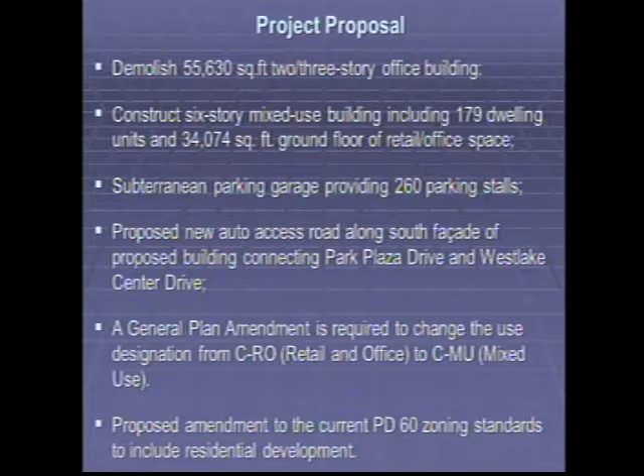Here's an existing and proposed site plan. This is the outline of the existing building. This is the outline of the proposed building. This is the new street that's proposed, where now it's a walkway. So circulation would come off of John Daly through this, what could be considered kind of an alley, and then through the parking lot and out to Westlake Center,

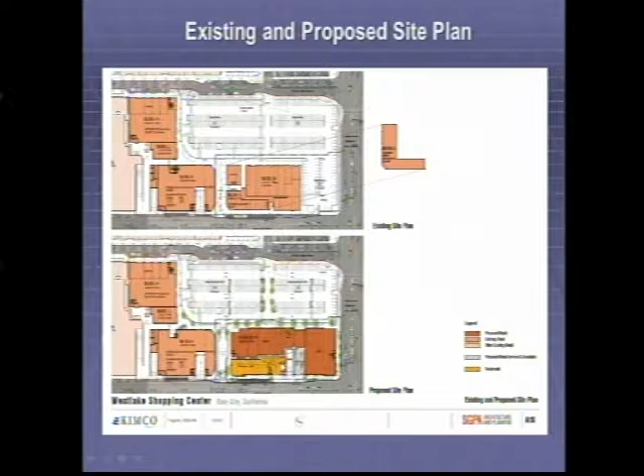A little bit more of a detail of the ground floor plan. This would be the main entrance to the residential portion of the building. This here is the residential leasing office. And then there is, of course, ancillary space in here for the operation of the building itself.

Here, this is the parking entrance. And this is the lobby, the main lobby of the building. This area here is sort of a service area for deliveries, including deliveries to the office area and residential deliveries for food and other things.

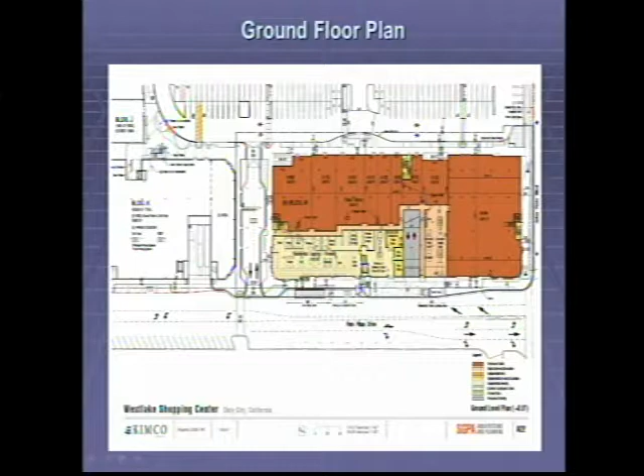This is a plan that we in the planning division had some concern about in terms of just how circulation would occur around the building, through the parking lots, out to

Westlake Center. This is a plan of pedestrian and bicycle circulation. The blue arrows are entryways into the buildings.

The orange color is bicycle circulation. The pedestrian circulation is this blue area here.

And the project sponsor will get into more detail, and we're still working this through, but it is acknowledged that the circulation around this area of the Westlake Shopping Center is much to be desired, and the insertion of this building and the activity that happens there will of course intensify it. So this is kind of still a work in progress.

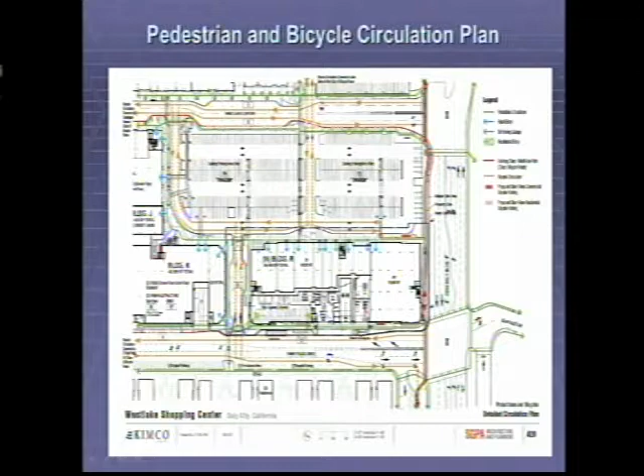The vehicular, bus, and service vehicle circulation is here in blue. So there's some attempt to try to keep them separate from the pedestrian and bicycle circulation and have them work together.

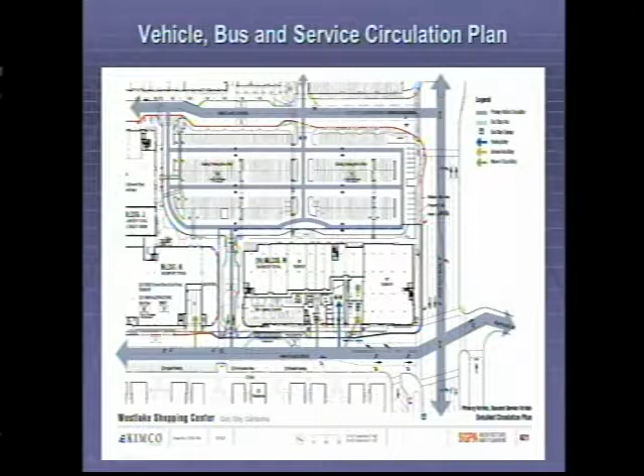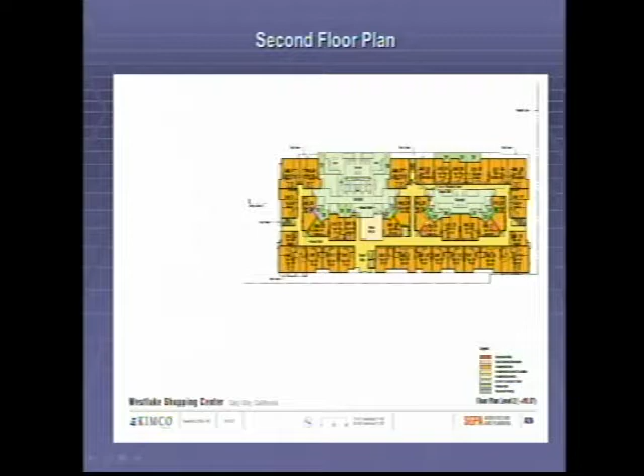This is a second floor plan, which also includes two courtyards that face the parking lot. Third, fourth, and fifth floors are typical to this scheme, all looking down on a courtyard facing the parking lot.

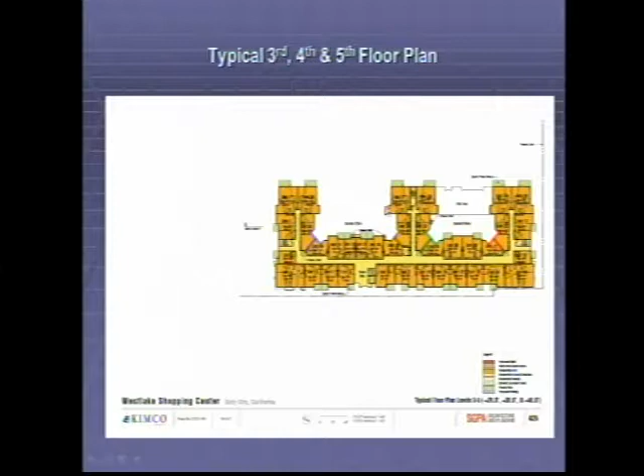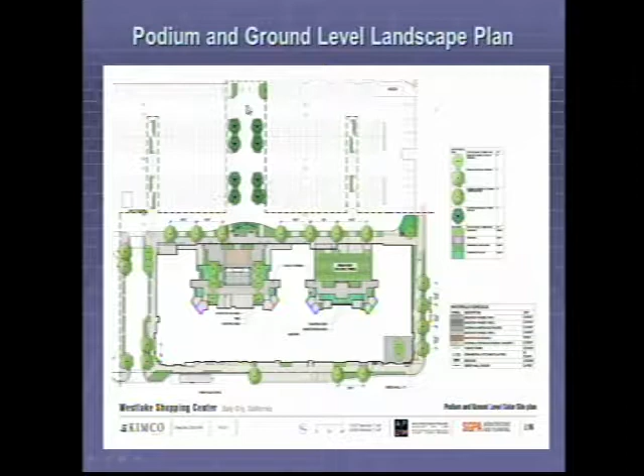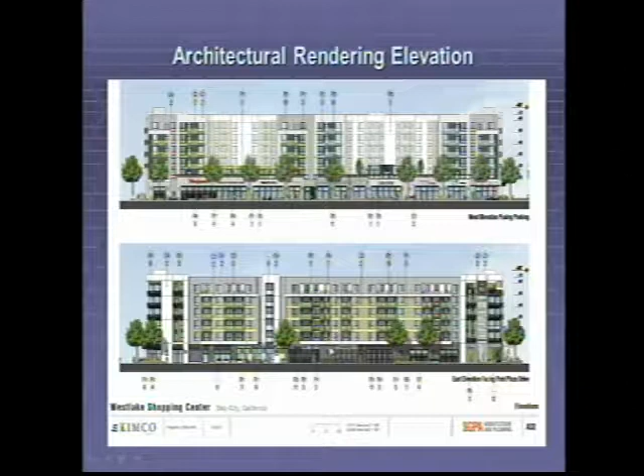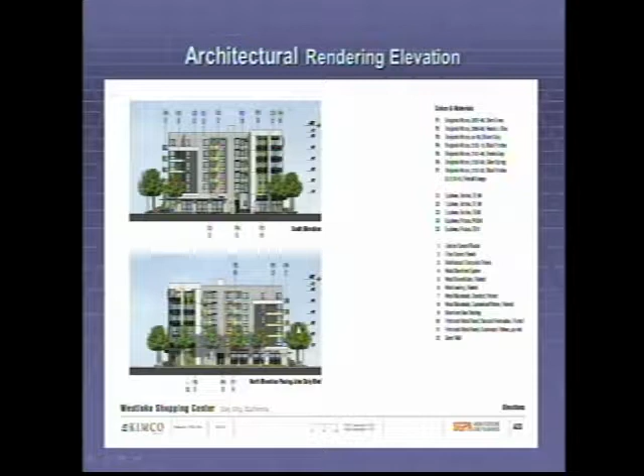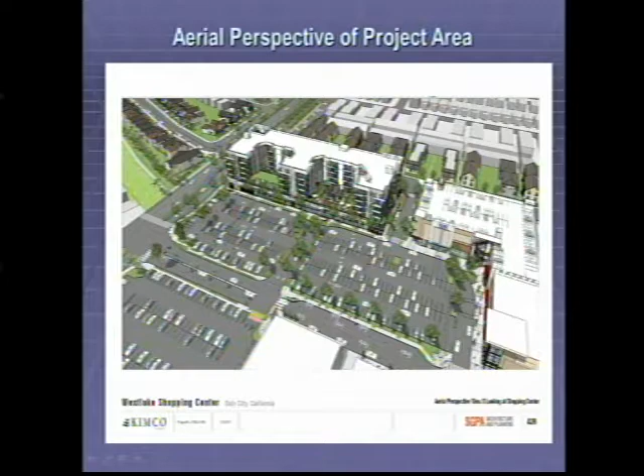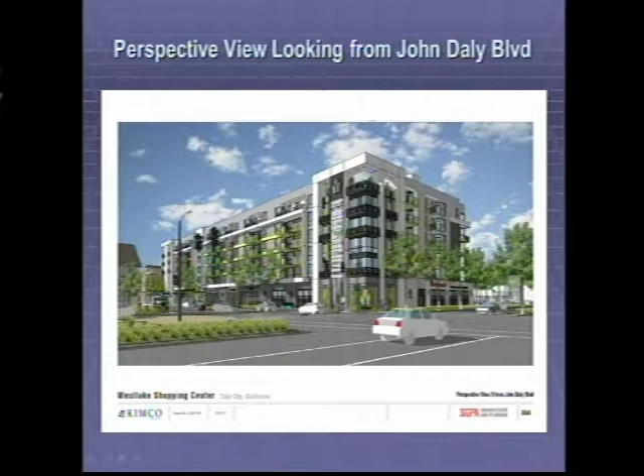Perspective view from John Daly, taking a left off of John Daly onto Park Plaza Drive.

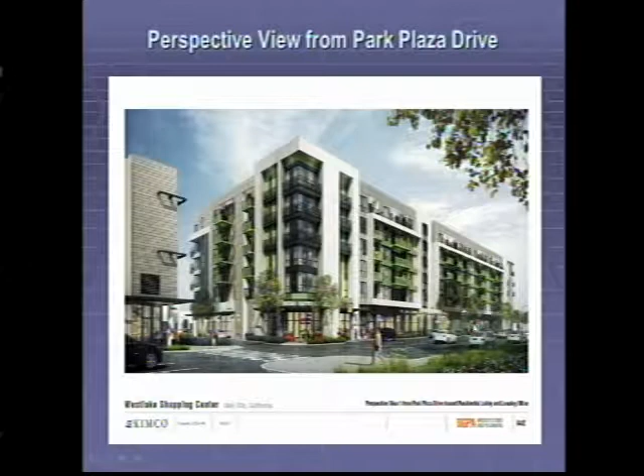This is Park Plaza Drive and the new roadway, between this and, I believe, Sleep Mattress here, and of course the proposed building. This is the leasing office, and this is the main entry to the residential portion of the building, and here are the vehicular entryways to the residential portion.

This is the corner of the parking area and the new roadway. You can see the balconies, how they're a little bit more defined, and you can sort of understand how the architecture works here.

Obviously, the architecture is very modern and sort of simple and clean, which is something that we thought was consistent and compatible with the neighborhood and the history of the neighborhood.

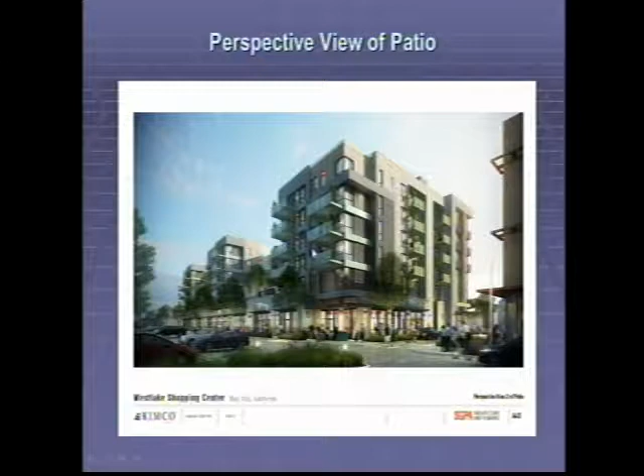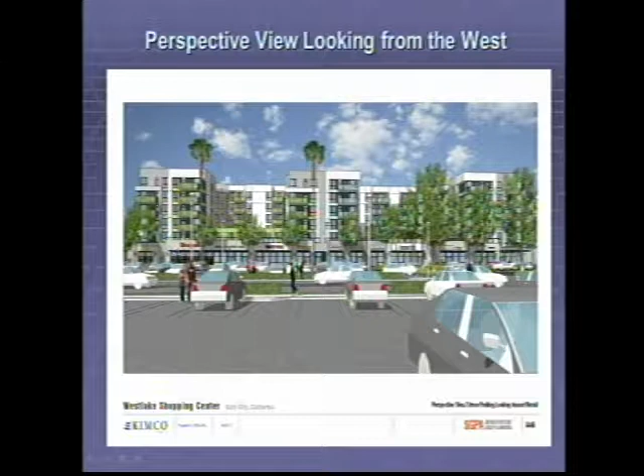Perspective looking from the west toward the building. Existing palm trees here, and all of these are, of course, a proposed tree planting scheme that was depicted in the landscape plan.

This perspective of Westlake Center Drive, looking at the west facade. We're still working with the project architect and project sponsor on proposed signage. This is silhouetted so you can see the building, but that's where the existing sign would be.

There's also some lighting discussion that needs to be had to make sure that there is pedestrian lighting, especially along the retail spaces, the retail portion of the building.

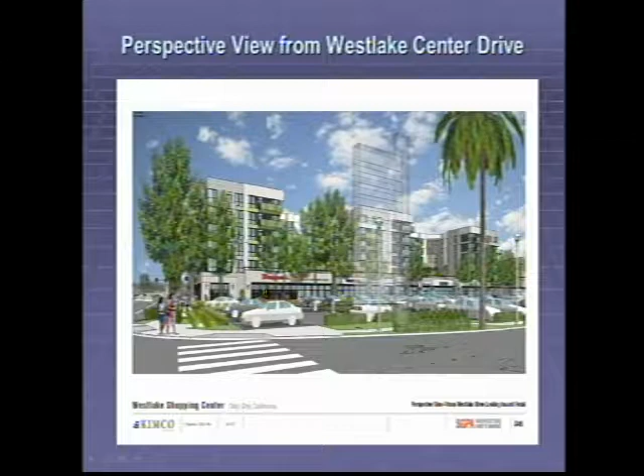These are photo simulations. They're a bit hard to see, but looking down Park Plaza Drive, this is the existing building, and this is the new building.

From John Daly Boulevard, we can see the existing building back here, and this is how the new building would fill that space.

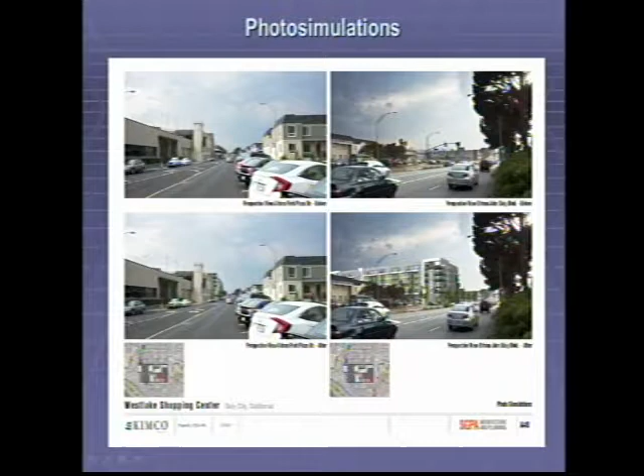Looking from Cliffside, that's the existing building over here, and this is the proposed building there.

And the view from John Daly Boulevard, this is a little further west. You can look back and see the photo simulation of the change in silhouette here.

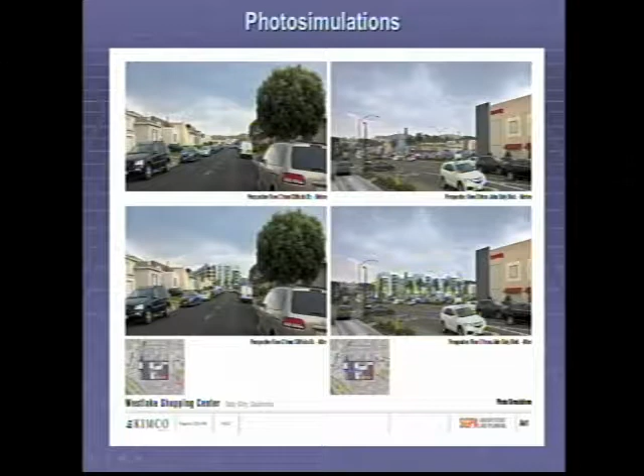The environmental study, or the initial study I should say, for the environmental review of the project is still under review by staff. We were able to extract a few things out of it and give it some initial analysis.

One of them was parking, the other's traffic. In terms of parking, the PD 60 zoning parking requirements are 3.29 stalls per every 1,000 square feet of leasable commercial space. The proposed project would satisfy the current parking requirement for the commercial use in the center, and separately satisfy the residential component of the project by providing 260 residential parking stalls where only 236 are required by the zoning ordinance. It is likely that staff will require the excess parking, which is 24 stalls, to be dedicated employee parking.

Project affordability: all rental projects of 5 or more units is subject to an affordable housing impact fee at the time the building permit is issued.

As I mentioned, the initial study is still under review. The project, as we see it so far, looks likely to require a mitigated negative declaration. The initial study does find the proposed project would generate fewer external vehicular trips than the existing development during weekday daily and AM and PM peak hours, and that the proposed project would generate 17 net new external vehicular trips during the Saturday midday peak hour.

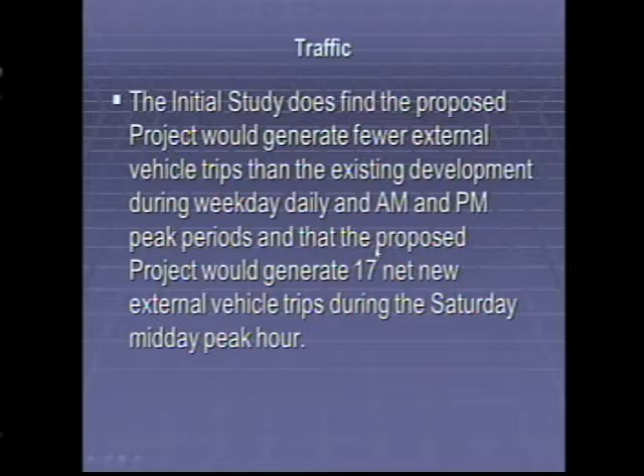The fiscal analysis of the project is estimated to generate revenues of $692,700 per year. The estimated city service costs for the proposed development is $220,600 a year. The net fiscal impact estimated is $472,100 annually. So there's about a 4 times revenue difference here, according to the fiscal analysis.

And I believe there may be someone here to talk about that if you need further detail.

The recommendation is that this preliminary plan for the amendment of the PD 60 be approved. Like I mentioned, the project sponsor, the architect, and I believe his consultants are here to answer any further questions you may have, and of course we'll try and answer your questions as well. Thank you.

So, we can ask questions? Okay, good.

Some of the figures and some of the ideas seem to be a little off. I live in Daly City for 33 years.

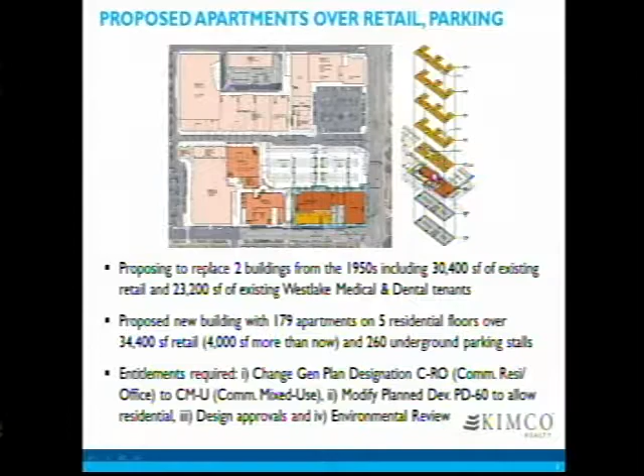All right, why mixed use? What are we doing? We actually think that the Westlake Shopping Center is a great place for mixed use. We're just over a half a mile from BART, which, while not quite right on top of it, is certainly walkable. You see the residents of the Westlake Village Apartments all the way around us that circle us, walking to and from in the mornings and the evenings. So it's certainly walkable to BART, and certainly bikeable to BART.

We plan to have really great bicycle facilities in our building so people can do that. The Samtrans bus lines also go to BART, and that's convenient for the rainy day or for people who may not be able to just bounce onto their bike and roll over there. We're very close to the freeway as well, so it allows people to get off of the local road network as quickly as possible, which I'll talk more about in just one second.

The shopping center, restaurants, services, the retail, these are great amenities for the residents. Can you imagine just being able to wake up in the morning, throw on a sweatshirt, and go down and grab your coffee from Starbucks, or you need a cup of sugar? Don't bother the neighbor, go to Safeway. It's right there. So many restaurants, they're right there. It's actually wonderful for the residents.

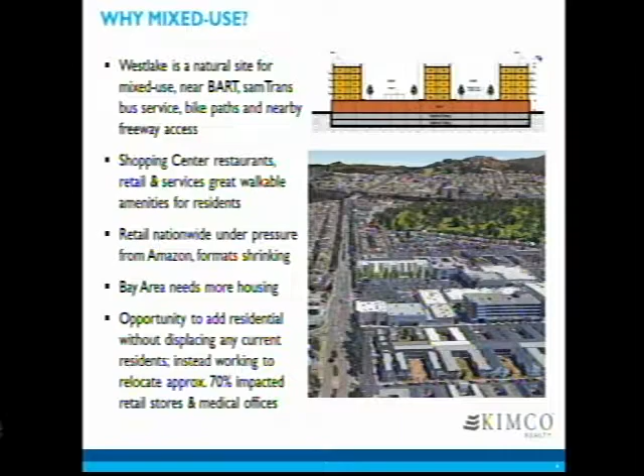There are some tenants there now. We have a number of tenants in these buildings. We are working tremendously hard to try to find homes for as many of them in the shopping center as possible. We know members of the community are used to coming to the Westlake Shopping Center, to their particular restaurant or services. There are some small businesses here. Our current goal is we're working towards trying to retain and find homes for about 70% of them. Hopefully more, but that's our goal currently, to keep as many of the valuable tenants who have been at the shopping center for so long in place, and keep them accessible to the residents that frequent them.

Just wanted to talk a little bit about some of the positives, and I think this will address some of the questions that have come up already. This shopping center, according to our traffic analysis—and our traffic engineer will be happy to come up and talk more about why—but in big picture, this reduces traffic by removing, shrinking, and dissipating the high traffic medical uses.

Right now, there's the medical office building, which has been there for a long time. The medical office building generates trips where people stay for quite some time. There are a lot of people. I don't think I've ever been to a dentist's office or a doctor's office where there aren't a number of people waiting. Most of those people have cars and they're in the parking lot, and that fills up a lot of parking spaces. So by moving those uses to elsewhere in the shopping center, by dissipating them, by taking them off of John Daly Boulevard, we're going to great lengths that helps shorten the average duration and dissipate the traffic and help alleviate the parking.

Currently, we're projecting to move the majority of the medical office tenants to the second floor spaces above the buildings that we own across Southgate. So on the other side of the shopping center, in a location that'll be accessible from more directions, that'll help keep traffic off of John Daly Boulevard. And with the vast parking fields in front of the Home Depot store and the Safeway across the street, if somebody can't find a close-in space right where they're trying to go, those parking fields are obviously well utilized as well.

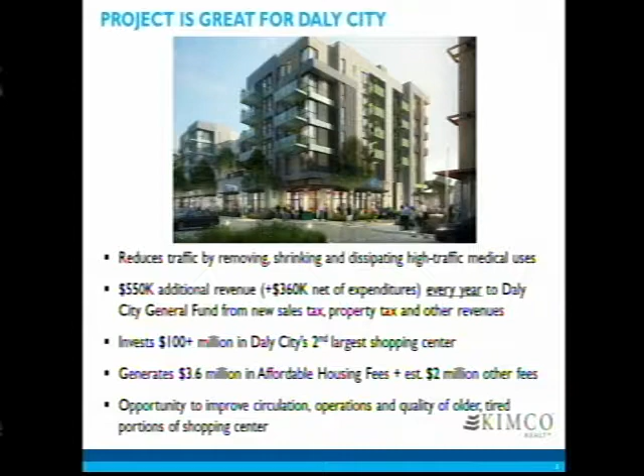Here's where I think the real impact is: this project gives us an opportunity to improve the experience at the shopping center, to improve the circulation, and to improve how the shopping center operates and the quality of the shopping center. Some of these buildings have been great, but they've lasted past their viable lives, and it's time to let us improve them. Okay, let's talk about the circulation. We know that circulation is important.

Just for inside the shopping center, the better the shopping center circulates, the less impact there might be to the surrounding road network and the surrounding community. The drive that Mr. Alvin was talking about, we think is really important.

Currently, from John Daly up through Safeway, there's no entry into the shopping center on the side. There's a one-way out in this vicinity currently, but if you're taking a left onto Park Plaza Drive, you have a ways to go before you can actually get into the shopping center. One way to alleviate the congestion at the main entrance is to offer a real entrance somewhere else, one that's very convenient.

So if you take a left onto Park Plaza Drive, by carving a new driveway through between the former Sleep Train, current Mattress Firm store, and the new building, we think this will be a really important entrance. Plus, sometimes cars can get stuck in here because of the congestion, particularly at peak times. This gives them a much better out than there is currently. So we think that this will improve the vehicular circulation immensely.

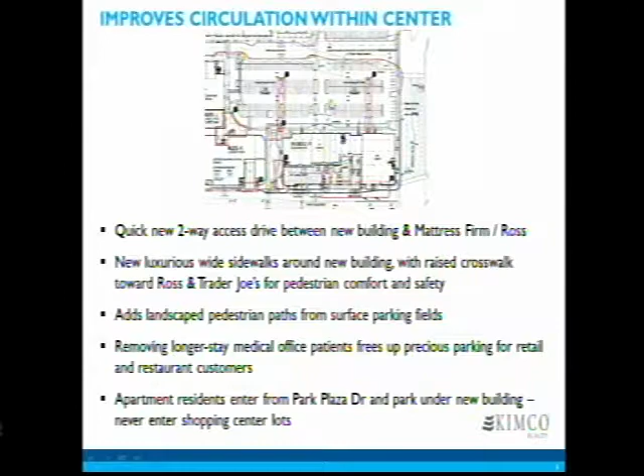So here we are. We're removing demand generators. We're giving much quicker access that won't mix with the cars that are looking for parking spaces here. We think that the functionality will be great.

All right, one other item we wanted to talk about, which actually came out of a meeting we had with staff. We were discussing our plans for the parking, and talking about how, coming out of that new driveway we just mentioned, if somebody can't find a parking space in the surface parking field, they can just bounce out of that entrance or exit, take a quick right, and then take a quick right into the currently underutilized garage at Ross.

And I thought I had it totally figured out. Well, okay, here was the problem. A member of staff said people aren't going to use that because they don't use it now, and it's because the vertical circulation, the vertical transportation, is less than ideal. The stairwells are very enclosed. They don't feel great, it's not a great experience. And should you choose to take the elevator instead, it drops you off in this enclosed hall, and it's just not a great experience.

So we said we can fix that. What we're talking about here is adding an exterior stair, so that say you park on the roof, you got a great parking space on the roof, and you're going to Trader Joe's. You have two options. You can come down this external stair. It's covered, so it's protected from the elements, but there's fresh air.

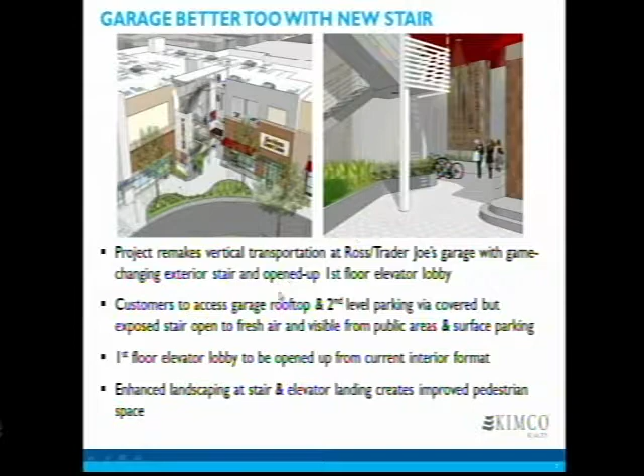We're removing some demand generators. We're improving the surface parking, and we're making this parking structure much more effective and a much better experience. So let's see, I think we talked about all of that.

We think that the building will make our shopping center better, and not just for the owner. We're talking about for the city, for the tenants that have their businesses there, for our neighbors, and as well as for our customers. We want a better experience for all, including the residents, with really high quality improvements and some wonderful restaurants and some great amenities.

In the new 34,000 square feet of retail space, we anticipate having somewhere between 3 and 5 restaurants. There's a great signature restaurant opportunity right at the corner across from the Mattress Firm. We're really excited about trying to find someone really special for that space. We think we're going to create some great patios, and it's going to feel like a really, really wonderful place.

This plan is just a concept at this point. We're here, this is a preliminary hearing. We'd love to understand some suggestions that the commissioners may have. We continue to field some really good suggestions and questions from staff, and we look forward to expanding into the greater community. We think we've got a great story here, and we look forward to sharing more of the details with the residents of Daly City, both close to us and further away as well.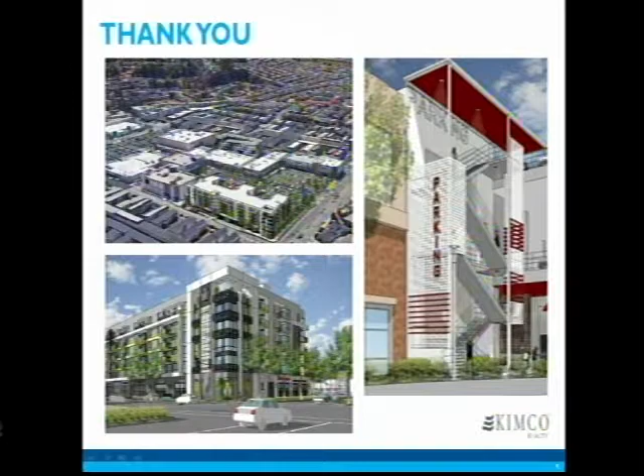Mr. Strauss, I understand, I'm speaking here for public interest. What will happen to the tenants that we have now? Will they be given a place in the sun where they can still do business within the location? The current tenants, what will happen to them?

Right, thank you, Commissioner Satori. We're trying to keep as many of them as we can. We know that many of them are very valued in the community. Like I said earlier, our goal is to try to find homes for at least 70% of them. We're working our way down through the list. It's probably premature for me to speculate as to who we'll find places for and who won't. We continue to get a lot of comments from the community, and I apologize if I'm not being specific at this point, but we're in active negotiations with many, and we're trying to relocate not just the tenants that we have to relocate, those with term, but trying to find homes for absolutely as many of them as possible.

Yeah, but through the chair, I was just thinking, have you thought about a shuttle, like a free shuttle for your people in the apartments that would go to BART? You'd have a certain period of time where the shuttle would go up and down. That would give people more of that opportunity and convenience not to take a car or not to have a car, where you could go to BART to go to work. If you can easily get to work and BART, that would be an advantage for the residents, and a lot of young people don't want cars, they use Uber and all this. So to make life even easier, I know Skyline has been doing this shuttle deal with BART, helping students get to and from Skyline, and it's been a big hit. I don't know if something like that you might consider or think about.

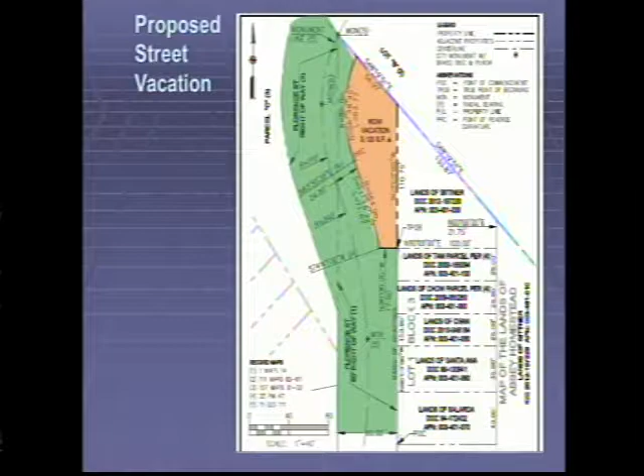Okay, any other questions, Commissioners? No. Of the staff? No. Okay, so at this time, do I have any public cards on item number 2? No public appearances on that.

Okay, so at this time I'd like to make a motion to approve abandonment of right-of-way that is consistent with our general plan. Second? Okay, thank you. May I have a roll call please? Satori, yes. Talarico, yes. Proano, yes. Di Giovanni, yes. Okay, so that's approved.

Okay, so now we're going to move on to public appearances, and this lady out here has a card. Where's her card? She didn't give me a card. She did fill one out. Mary. Yes, she filled out a card. Mary Broker, she was called a while ago. Oh Mary, yes, I'm sorry, the first one. Wait, let me get my glasses, fine, it's right here. Marion Broker, right? Good evening, Commissioner. Good evening. I think I may be in the wrong place. Oh, that's alright.

I am appealing to the Planning Commission to direct the Permit Department to stop allowing investors coming into my neighborhood and adding additional basement rooms to rent. I've lived here since 1974 in the Westlake Estates, and over the last 5 years, about 5 investors have moved in, totally neglecting the landscaping. They're advertising rooms on Craigslist for $850 each, sharing kitchens and baths. Two doors away from me is a rental with 7 tenants and 6 cars.